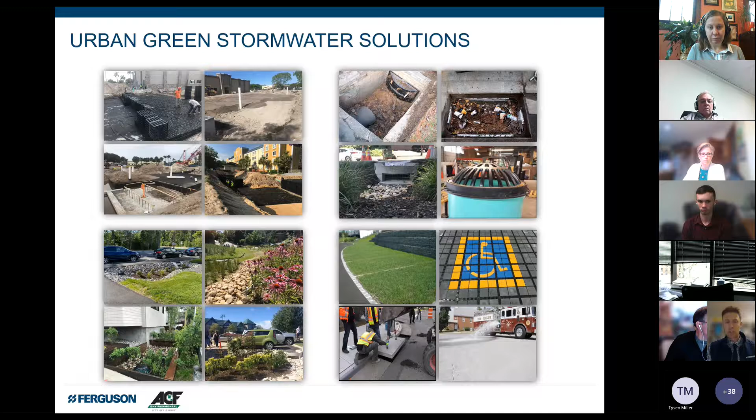So I work with a lot of different solutions in this space. The good thing is today we're not talking about products or solutions, we're talking about impact and natural resources. No matter where you go, every city, every town is dipping their toes in this green infrastructure space. Some have been doing it for many, many years, like New York City and Philadelphia. Others have been slow and steady to adopt, like in the Pittsburgh area, great set of demonstration projects.

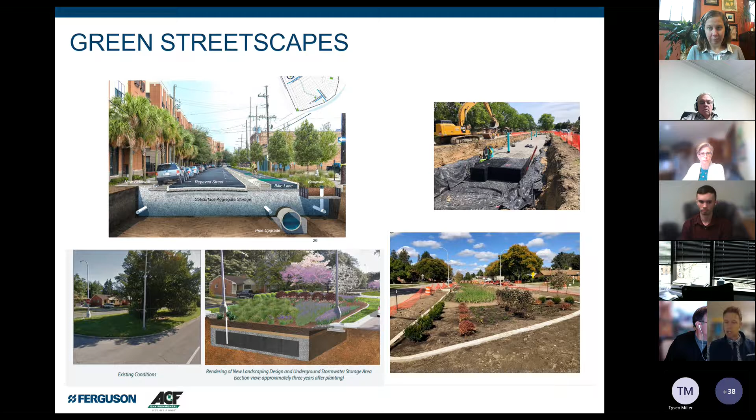And like Annie said, now it's kind of beyond that point. It's time to really push this stuff forward. But no matter where you go, everyone's got their different take on it. Some are more focused on water quality, some are more focused on water quantity, probably water quantity being the more popular option. And everyone has different expressions of what that is going to look like. The early adopters have learned a lot.

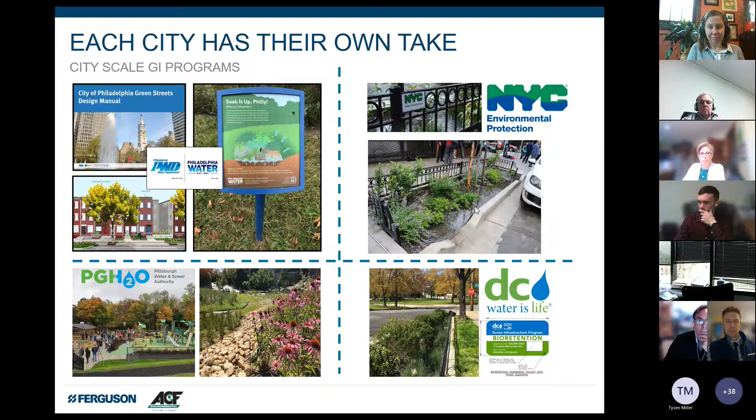But when you get into these urban settings, there are different complexities. We're dealing with tighter spaces, we're working around existing infrastructure, and construction may be affecting local businesses if we're in a streetscape application.

There's the need not to just throw it in the ground and say our work is done, let's move on, but actually monitor it, maintain it, see how it's performing over time to make sure we're not just spending a ton of money putting stuff in the ground to check a box, but it's actually having a positive impact on the natural resources downstream.

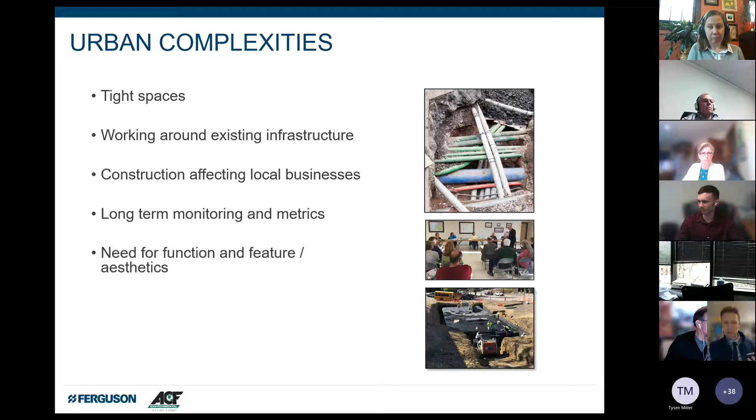The challenge of green infrastructure specifically is we're trying to get functional stormwater systems, but then there's a high expectation for them to look good as well. So planted systems, pavers, and all these different things - this is a tough balance to get right. This is where we need a civil engineer and a landscape architect to be linked and working together.

What I've also noticed is there's the research bucket, the design bucket, and the maintenance bucket. It seems like in general those are working somewhat mutually exclusively from each other. If that's the case, we're not taking what we learn in maintenance and bringing it back to what we need to research next, or how we're impacting our designs as we move forward. We'll touch on some of that today.

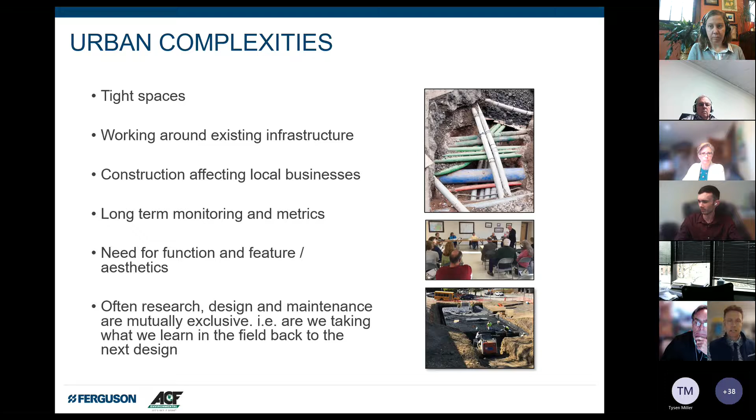So I work with a suite of solutions to overcome a lot of those challenges. Recently I added the word resiliency and climate change to this list. This is becoming a bigger issue, specifically on the municipal side - looking at a lot of undersized municipal stormwater BMPs that can't handle the kind of rainfall events and intensities we get today, and we're having to make adjustments to those.

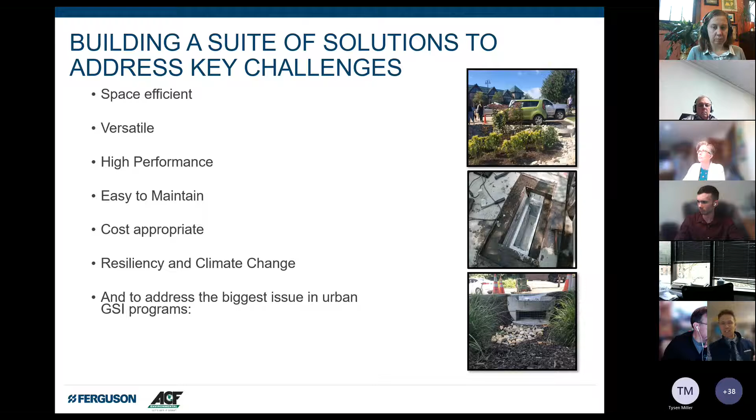One of the biggest challenges we've had to dive into is the need for better pre-treatment. We can put in the most amazing bioretention, the most amazing ponds in the world, but if there's nothing there to protect that system, not only do they end up not looking great, but maintenance becomes very expensive and time consuming.

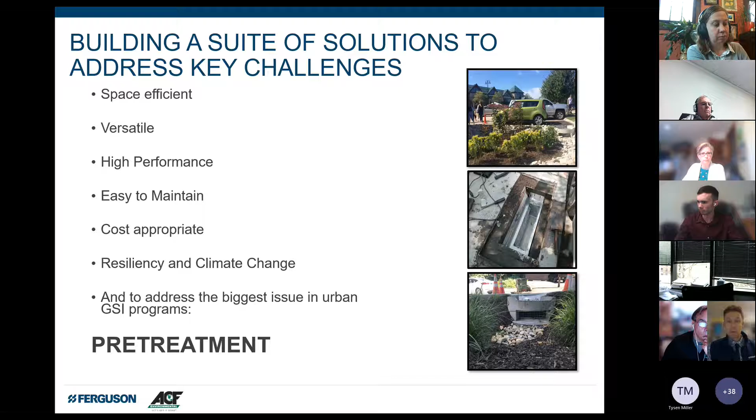We're seeing a lot of cities shift to this, including Pittsburgh, and I really enjoyed the presentation from Ryan Quinn and Anna Flores at Three Rivers, where they talked about stepping back and doing a better job protecting these things - whether it's curb line filters and screens and things like that - so we can have better outcomes and make our maintenance budgets a little more palatable.

Out of all these different things I've seen, people I've visited, engineers I've worked with, plans I've worked on myself, cities I've engaged with, I've kind of identified some shortcomings. They're not very amazing shortcomings, but a couple of things I started to see trends with.

A lack of interaction between owner and designer, specifically when it comes to maintenance and long-term needs. Interactions between design teams - civil engineers working mutually exclusively from landscape architects or the urban planning side, or not folding in some of the social or community pieces that need to be part of that process.

Quality bid documents - we're seeing across the country a lot of 30 to 50% drawings hitting the street for bidding. Well, those plans don't have the detail needed for successful projects, and when they don't have the detail needed, the quotes come in at a lower price than what's actually needed to fund the job. Then the job gets funded and there's not enough money to actually get what you want, and it starts to unravel fairly quickly.

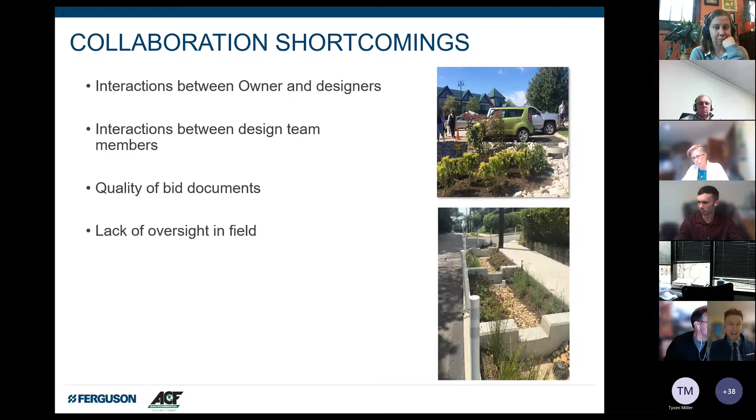Lack of oversight - no one's out in the field, and then we come out at the end of the job, point the finger and say you didn't get this right, you need to dig that up and do that again. The contractor's like, where were you? I was here for two months, where were you? We could have worked on this together. So we miss out on some of that collaboration.

And then, of course, one of the biggest challenges is identifying and following through on post-construction maintenance protocols, which we'll talk about a bunch today. I think historically, in the design community - and I know a lot of folks on the call today are from that group, so that's where I'm going to target my conversation - we've looked at this process as a one-way street.

We have design, we go into permitting, bidding, installation, and then maintenance, and then it's kind of like the end, right? But if that's the end, how are we learning from what we see in the field? I think there needs to be this reconfiguration of things where we get into more of a loop, and we have that maintenance, that voice of maintenance, impacting design.

I've seen that work really well in areas like Philadelphia, very strong focus on maintenance and learnings from that coming back to the front end. I had a great conversation with some folks from PWSA earlier in the week who were talking about this idea of maintenance being part of the planning process. Such a cool concept, such an important process for us to make sure that what we're putting on plans and what we're designing is being done with maintenance in mind.

So all of that said, I kind of kept seeing these things and I'm like, are these really shortcomings? Am I misreading the audience? What are we doing? What do I want to do? I want to survey folks.

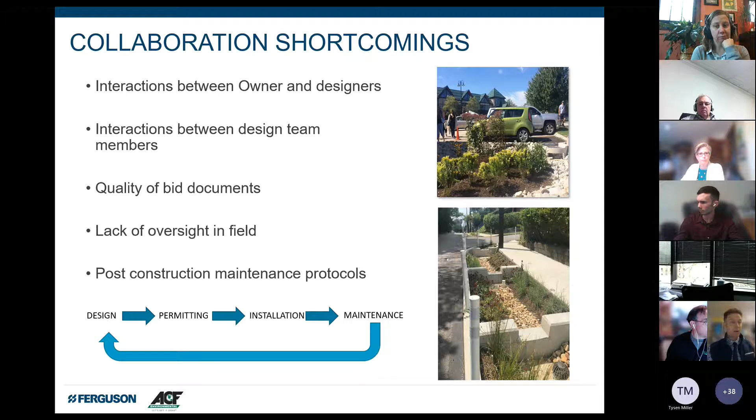So I said, I'm sick of going out and seeing these green infrastructure systems that probably don't look particularly great to the general public. Obviously, this one, not the greatest looking rain garden. This one was a civil engineering masterpiece where we had a perfectly rectangular rain garden with one plant species in perfect rows and lines. Boom, civil engineering masterpiece.

I get it, I see the beauty there. Trust me, a 90-degree corner is far better than some kind of curve. Or this one where plants were excluded and we just bulked up the riprap a little bit, right?

These are challenges. Or trash, debris. Are we planting trees just in holes? Are we providing environments for them to thrive? All these shortcomings all come back to, I think, some pitfalls in the whole collaboration process on the front end. So that's not me, but could be me as a response to some of these things.

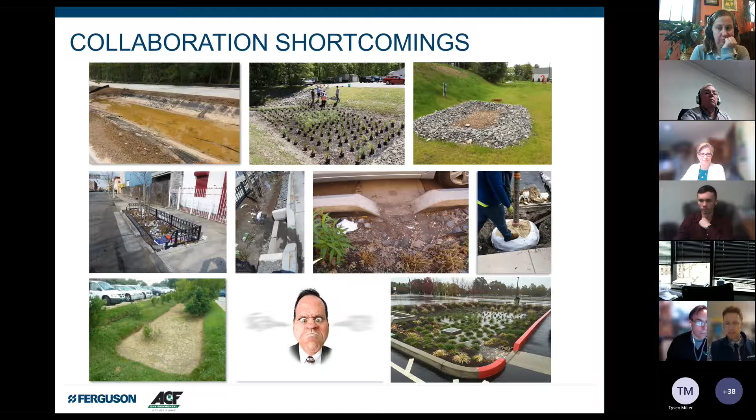So the survey was really created late one night, as many crazy surveys begin. The goal was really to try to get some useful feedback from the design community to confirm or maybe deny some of the thoughts I was starting to see, or patterns I was starting to see out there. I got a great response from designers.

Representing people from all over the country, predominantly on the East Coast. I thank you for those on this call who participated in the survey. I'll be honest, as we go through one by one today, the questions aren't perfect, and the answer options I provided were fairly simple. If I was to go back in time, I'd probably refine some bits and pieces.

But the goal was basically to address some questions about the design process, construction, maintenance, and then the overall connectivity between those pieces, and hopefully have the results shed some light on some things that we as designers need to think a little bit more about when we're engaging in these types of projects.

Now, not to share the conclusions before we get started, but it confirmed a lot of things that I was expecting, but I was hoping weren't true, if that makes sense. I was kind of hoping the data would restore some faith in the process, and unfortunately it confirmed a few things. But regardless, I think as we go through this survey today, question and answer one by one, I'm going to work through it all with you guys.

You'll start to see where there's parts, in your area of influence or your specific function at your company or your municipality, wherever you may be, where you can kind of step forward and say, hey, you know what? Maybe we need to step back a little bit and think a little bit more about this process before we dive into the next one.

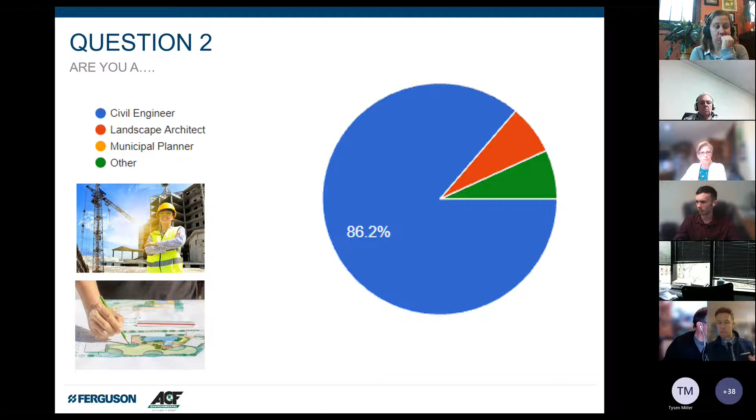Pretty big turnout from the civil engineering population, which I was a little bummed about. I was hoping to get a little bit more landscape architect wedge in there. But regardless, what I'm starting to see is landscape architects driving more of the planning process for a lot of these green infrastructure projects, which is great. So there needs to be that. Hopefully, if I was to do this again next year, we'd start to see that pie chart open up a little bit. But regardless, that's kind of the mix of people, just so you know who we have on this in terms of their professional duties.

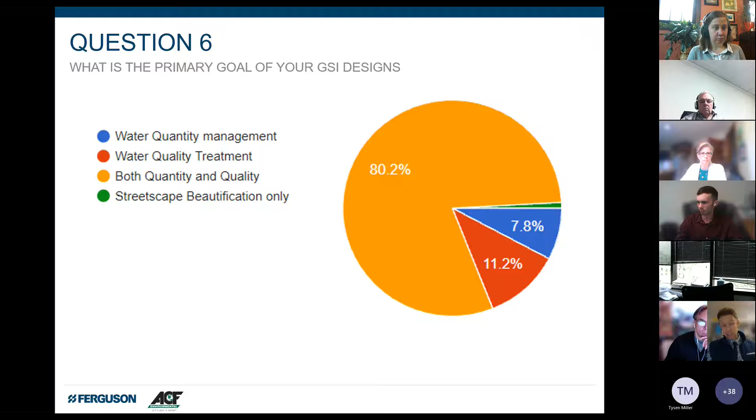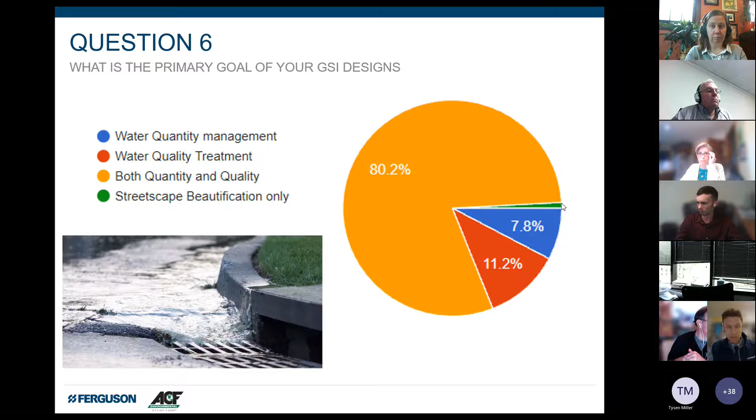What's the goal of your GSI design? Is it water quantity? Is it water quality? Is it both? Or is that not really your focus? Is it just about streetscape beautification? Here we have actually something that I expected, and something that was a little unexpected, I would say. Based on a lot of the programs being primarily volume focused, I thought there would have been a bigger wedge here in the blue. But it's interesting to see that well over 3/4 of the goals of these projects include both treating or filtering water as well as managing the volume piece. So that I found actually kind of interesting. And I think one person here pulled out street beautification, representing in the green corner.

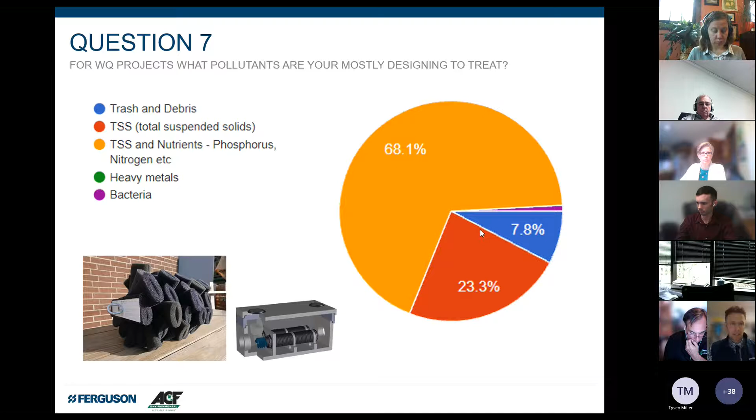I would expect that in a year or two, if we were to redo this survey, that purple wedge would start to open up a fair bit, because bacteria—a lot of the plans or environmental studies I see out there will talk about two issues: impervious area, and now quite a few on the coastal sides are bacteria.

I don't think a lot of people know how to manage the bacteria part of that. I know there's a few folks on the call from Fabco today who make a couple of products in that space. Question 8, this is one I was really nervous about: are you passionate about the connection between your design work and defending downstream natural resources? Yes I am, kinda, or nah, it's just what I do for a job. A little bit of honesty here in the yellow segment, right? But this is actually pretty cool.

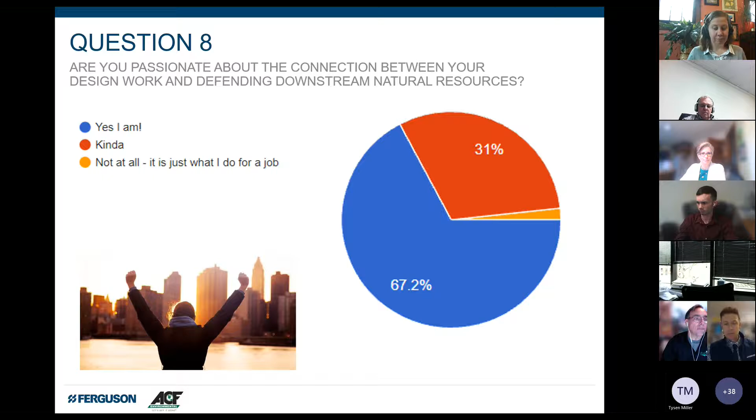Two-thirds of people, almost on the dot, are passionate about that. I don't know what that looks like—would they go home like, 'honey, I can't tell you what I did today, I designed a rain garden'? I don't know where the passion goes. But the good thing is that there's a connection there, because if there is no connection, we're never going to fully uncover the triple bottom line co-benefits of green infrastructure, because we miss out on a lot of those social and community impacts, since it's not even affecting us as humans. So there's our hero right beside the lake, excited about what just happened and the nearest upstream green infrastructure project.

Question 9, going into those triple bottom line co-benefits: do you believe that your designs connect with the triple bottom line co-benefits of GSI? These are described in many different ways from one place to the next, but usually in the environmental category that's an easy one to do—you're like, yeah, we're filtering water, boom. But then the social and financial benefits, how are those pieces being communicated?

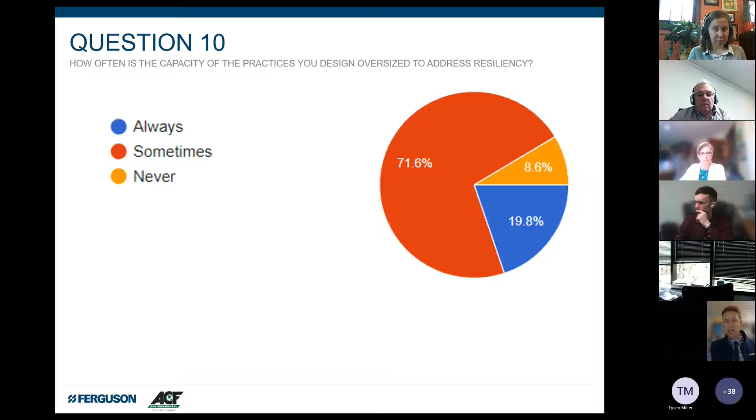Question 10: how often is the capacity of the practices you design oversized to address resiliency? Always, sometimes, never. This one was kind of interesting—sometimes was actually bigger than I thought. I had a feeling it was going to be more in the never category. But regardless, if we add half of the sometimes—say we take 35% there—and add that to the never, close to half of the respondents aren't thinking about the need to take maximum advantage of the space we have for storage for future issues.

So trying to work out ways to maximize storage so we don't have these issues with these types of rainfall events, the frequency and intensity we have. Resiliency seems to be a big buzzword at a lot of conferences and seminars these days, and we're seeing a push on the funding side as well as implementation to say, okay, we could fit 100 cubic feet of water in the ground here, but for a small incremental increase in money, we could maybe store twice that amount. AKRF did a really interesting study that Tom Bertroni presented early in the year for PWSA, specifically about how if you double the size of a system, it doesn't necessarily double the cost. That's something we have to keep thinking about—if we're going to dig a hole, that's the best time to do the most we can possibly do with that hole before we move on.

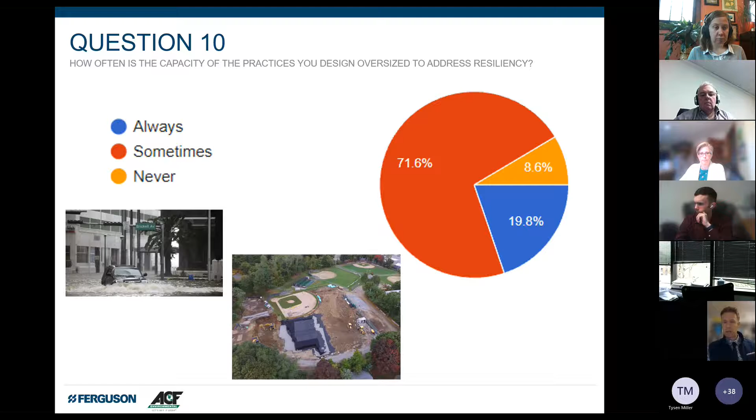Question 11: do you include innovative and proprietary practices in your design? This was kind of a curious one for me—I'm in that innovative proprietary practice space. So is it always? Is it sometimes, when traditional practices aren't feasible? Or is it never?

Great answer here. Obviously we've got a few folks who use them all the time, 85%. I think this is a perfect space to be—folks saying, okay, I'm going to evaluate the traditional practices, I'm going to see what I can do, but I know that if I can't get those to work, I have other alternatives I can go to. I was encouraged to see only a very small portion say never. That was a good one.

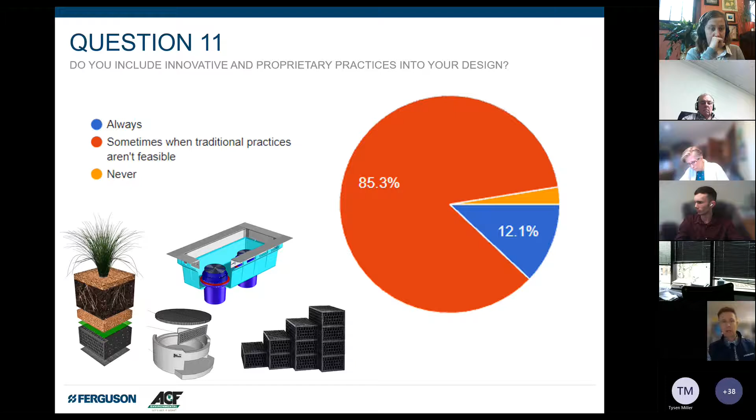There are many things out there for all kinds of different needs: space efficient rain gardens, filters, cartridges, screening devices, different storage devices, chambers, tanks—all kinds of things that can be used to try to optimize design, especially when space is tight.

Question 12: do you research new design approaches in GSI, or stick to what you have used in the past? Options were: always look for new approaches, sometimes look for new options, but generally stick to what I've used, or never use new approaches, never.

I think, honestly, we really want to see that be 100% looking for new approaches, because we have to look at what's out there, study the projects around us, different cities, what they're doing, learn from those, and fold them in so we don't get stuck with the same design manual 10 years later and wonder why we aren't improving our outcomes. So think about trying something new.

Question 13: do the civil engineer and landscape architect collaborate and work together in your designs? This is one I was really curious about as well. Do they always work together well or collaborate, sometimes, or never?

Some truth here, we got 8% in the never—that's not a good place to be. This is a little unsettling for me. Again, if we look at the sometimes, we split that in half, so it's about 30%, add that to the never. We're saying that around 40% of the time, we're not collaborating well between the civil and the landscape architect.

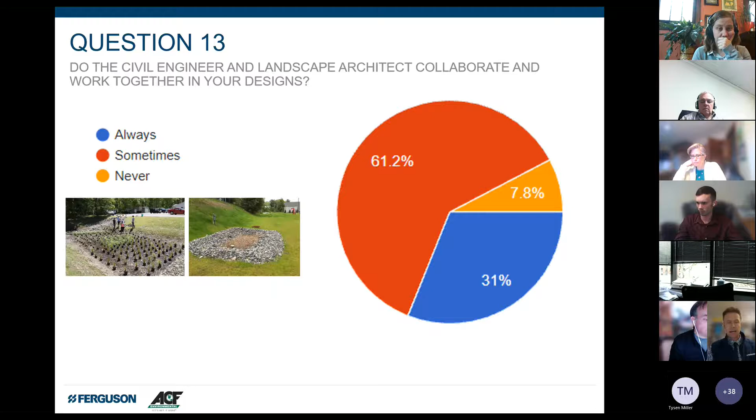To me, that's a major flaw in the process, because especially when we get to surface green infrastructure, we're thinking of plantings and things like that. We don't want the civil engineering masterpieces I was talking about earlier. We need to make sure these systems, whether it's plant selection, plant location, shape, size, dynamics of the system, whatever it may be, both parties need to be involved. So we've got the functional part and the aesthetic part, or the feature part.

And I criticized these publicly earlier—I'm sure I've designed things that look exactly like this in my design past. But then on the other side, landscape architects maybe have too many plant species, or they're too close together. There's kind of a happy medium between these two approaches, where maybe you have 3 or 4 plant species with a certain amount of spacing between them.

Because the key thought is, when maintenance crews come out to look at these things, they need to be able to determine what's a weed and what's a plant, what's an invasive and what's not, and call things out accordingly. If there's confusion, they'll either leave it to overgrow or deadhead the entire thing, and that's not really what we want to see.

So it's really important that these groups are working together. I know a lot of firms now are starting to fold both groups into one firm, so you can work collaboratively in that same office. I think it's fantastic. A lot of firms still sub one part out to the other. This is something we have to really get resolved, because the aesthetics, the public opinion, is often heavily tied to the way these things look.

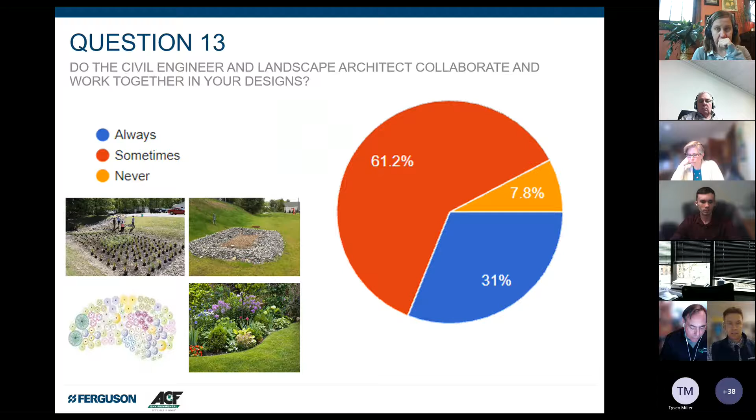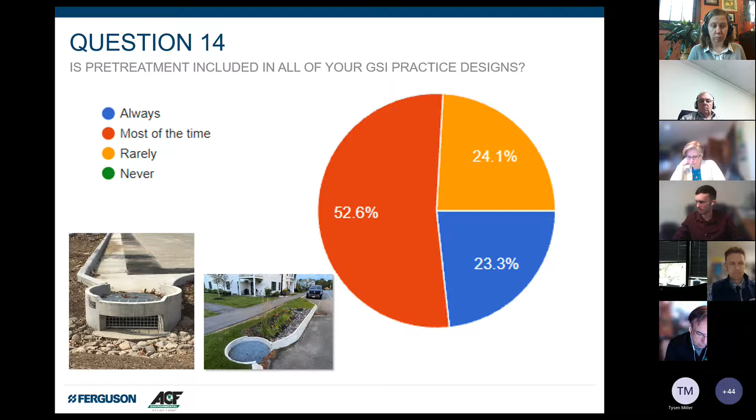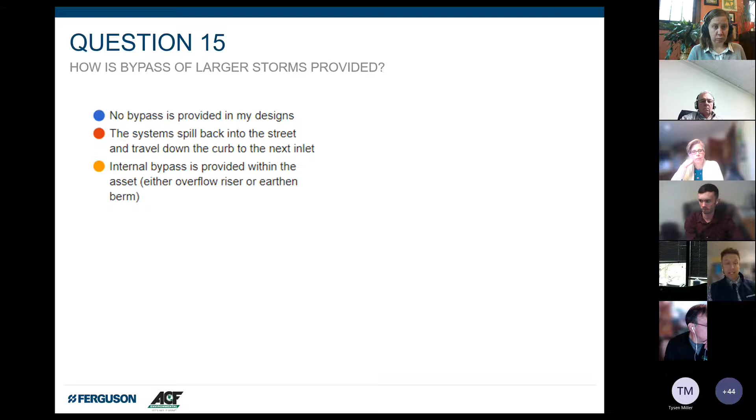This is a big one. Question 15: how is bypass of larger storms provided? No bypass is provided—the systems spill back into the street and travel down to the next inlet—or internal bypass is provided. This one was pretty encouraging. Most folks are realizing now that having some kind of internal bypass makes a lot of sense. Usually that's some kind of domed overflow, which helps rather than just spilling out wherever it wants to go, or when it spills back onto the street, functionally that can make sense to go into a downstream inlet.

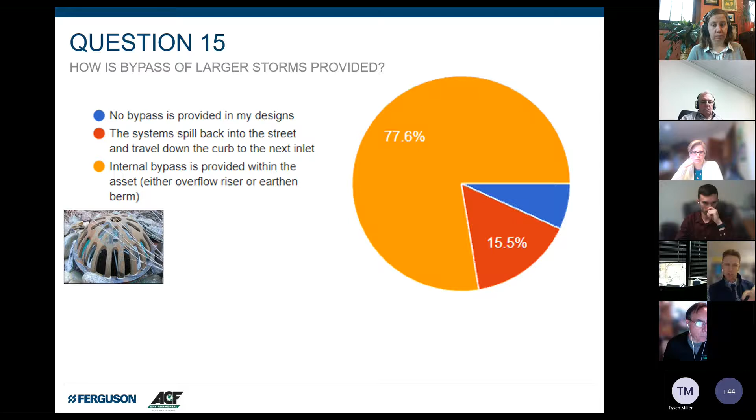But public perception can be confusing there, where they think, oh, this rain garden's failed. Well, no, it's actually at its maximum capacity, and now it's heading down the curb. That can look a little odd. Especially where we have winter climates, icing along curb lines, we want to try to keep things internal to the system. But when we put in these domed overflows, they can also turn into mulch cocoons, or whatever we want to call them, where floatables and things like that gather at this kind of overflow.

This is a challenge because a lot of states and cities design with very small diameter pipes downstream of these systems, so there's some great options out there. We actually can deploy a filter bag in these. This is something PWSA does routinely, and Philly does the same thing with Philadelphia Water Department.

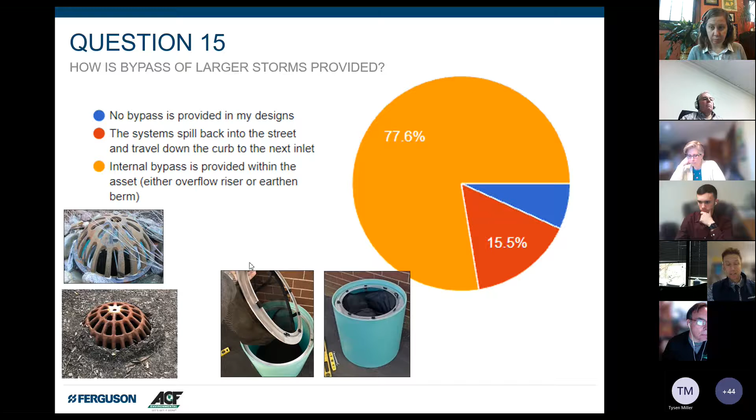This is actually a really nice retrofittable device that my friends from Fabco on the line make. What's nice here is it's an expanding ring, so it goes into the structure and you can expand it out so it presses against the wall. That becomes the mounting ring for the bag, versus hardware going through that. But despite that, this allows you a place to collect that mulch and trash, which again makes maintenance easier—good for that kind of bypass protection.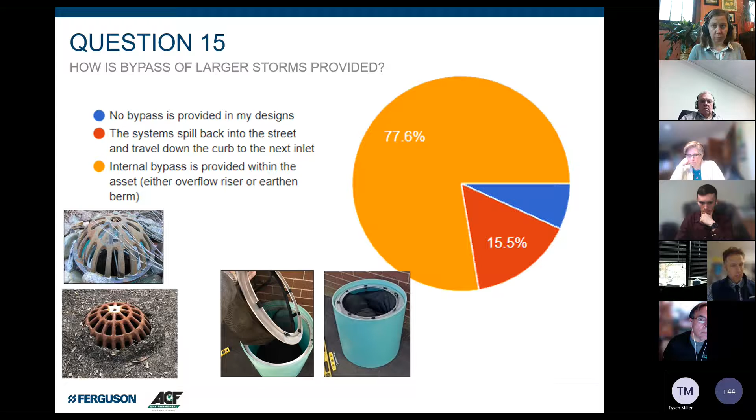We're seeing a lot of cities line up to say, hey, that's not a bad idea to add. Question 16—we're past the halfway mark now. Do you design with permeable surfaces? Often, sometimes, or never.

This was kind of an interesting one. 70% said sometimes, so if we split that in half, we call that 35% and add that to the nevers. About half folks don't entertain permeable surfaces in their designs, which is interesting because it's a pretty popular way to get water into the ground, especially with shallow groundwater and not a lot of vertical room to work with. I think the challenge is a lot of the early types of systems with permeable surfaces don't hold up well in winter type areas, whether it's snow, sand, or salt. Those early products like straight up porous asphalt have maybe jaded our interest in doing this over large areas.

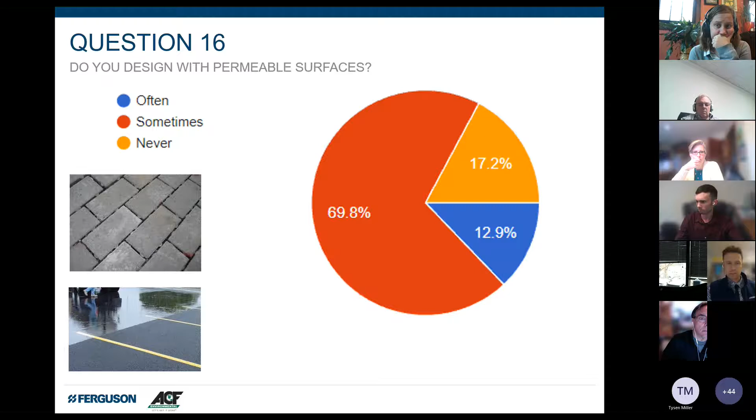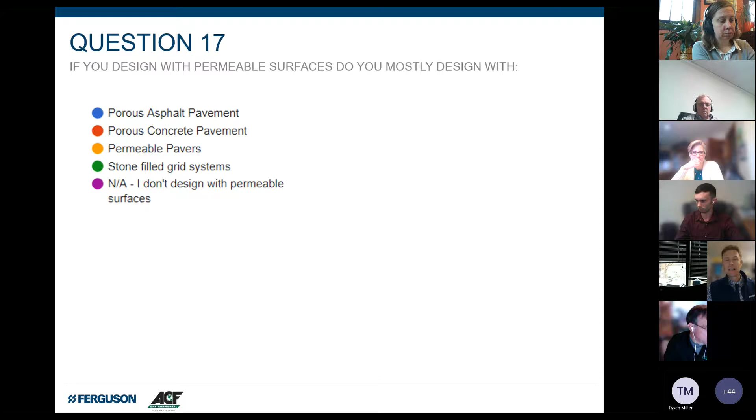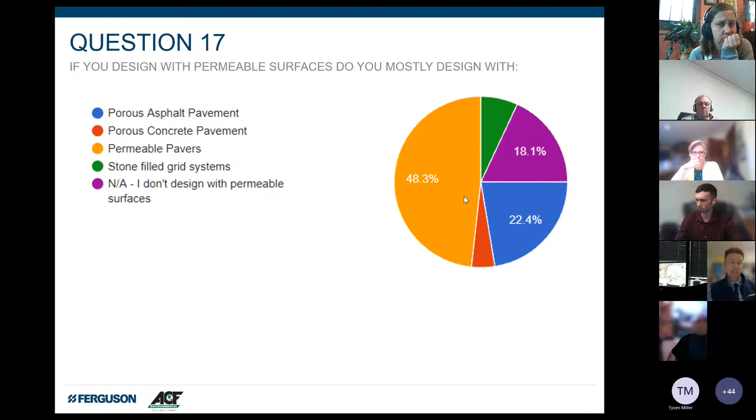So let's dive a little deeper. If you do design with permeable surfaces, what do you mostly design with? Porous asphalt, porous concrete, permeable pavers, stone-filled grid systems, or I don't design with permeable surfaces. So there's our 18% holding true on the 'I don't use them.' But interestingly, about half the folks are looking at permeable pavers, which I think is pretty typical. You get some aesthetics out of it, and generally you can do them in small areas versus porous asphalt that you need to do over larger areas.

I co-presented in New England a few weeks ago where UNH was sharing some of their research on porous asphalt, and there was also a consultant who does a lot of work with porous asphalt talking about their experience. The consultant said that porous asphalt mostly, depending on where you're located regionally, generally only makes sense if you're doing even as little as an acre. An acre or more is where you hit the threshold where it makes sense for the plant to make it, where the QA/QC is in place to get a good mix, good placement, and oversight. I would say maybe half an acre or more, but this particular consultant said an acre or more.

So for smaller sites, these small retrofits or on-street parking or whatever it may be, I think that's why pavers make sense, because you can do one paver or however many you want. The other interesting thing from UNH's study on porous asphalt was they found that even with routine maintenance, by the 10-year mark all of their permeable asphalt had become impermeable. It was no longer taking water through. They also found when they did test pits that the only thing clogged was the porous asphalt itself - the stone beneath was clean, the underdrain was clean. It was purely a clogging of the surface and an inability to rejuvenate it without digging it up. I thought that was kind of interesting.

A lot of the work I do is with permeable pavers, but even beyond general permeable pavers, there are open joint permeable paver systems out there that don't even put aggregate infill, so you get really rapid transfer through and really low maintenance. So if you're kind of a skeptic on permeable surfaces, keep an eye out and take a look at some of the newer innovations.

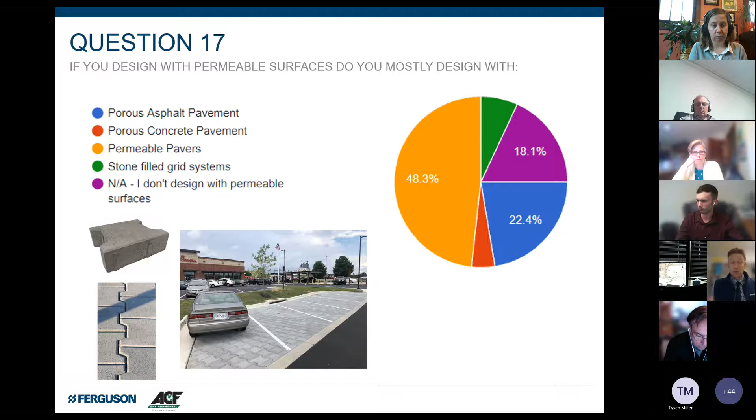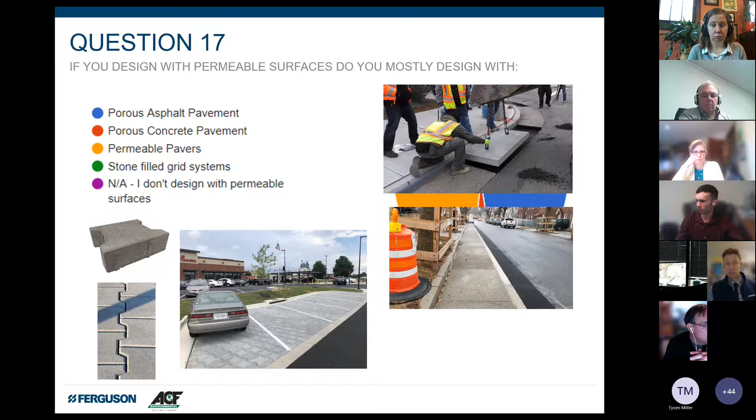There's also precast porous panels out there, and I think some folks have seen this product called Stormcrete that Porous Technologies make. It kind of overcomes the cast-in-place issues, again with a quantity piece, but also provides a product that can be picked up after the fact, cleaned, replaced if needed, and put back, versus that porous asphalt surface that once it's clogged up, you can't really do much with it. So there are different things coming out that solve a lot of the challenges there.

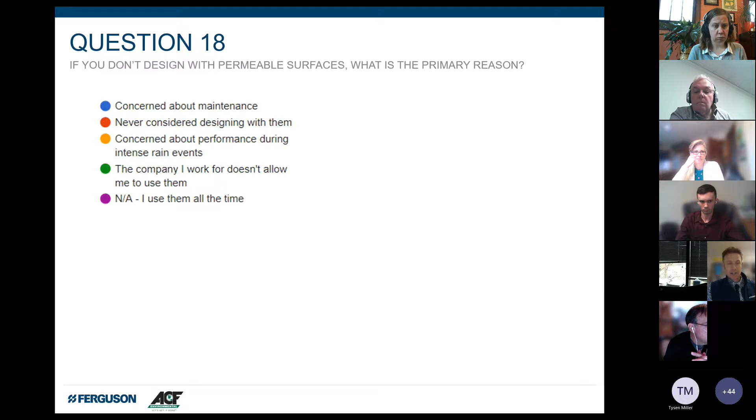Question 18: if you don't design with permeable surfaces, let's get over to the nevers. What's the primary reason? Concern about maintenance, never considered designing with them, concern about performance during intense rain events, the company I work for doesn't allow me to use them - I heard that once, so I added it - and not applicable, I use them all the time.

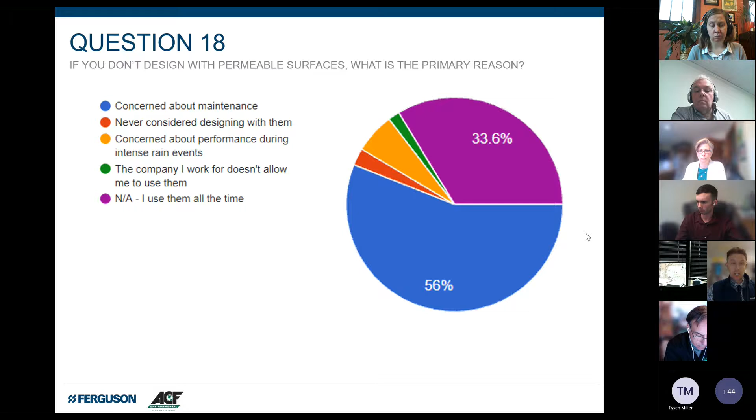So as probably can be expected, that maintenance concern - maybe that's budget, maybe that's equipment, maybe that's frequency, cost, who knows - but that's generally where we see the primary concern. And then again, these folks saying, no, I'm good, I use them all the time. So maintenance is that big question around permeable surfaces.

I think when it comes to these surfaces, you've just got to come up with a plan where you've got routine maintenance happening, vacuuming them out from time to time, not waiting till it gets to that point of failure, because that's where it becomes much harder and more expensive to rejuvenate them. There's a number of companies that have a whole bunch of different vac heads out there to help with this process.

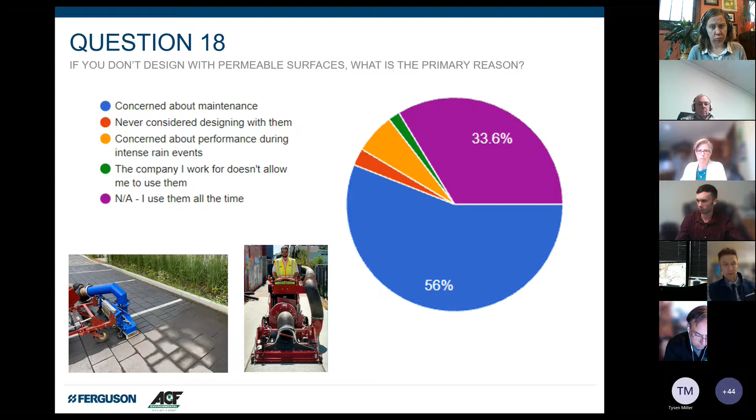Question 19, getting into some plants piece now - is plant selection a priority in your design? Always? Sometimes? Never. Brace yourself.

Okay, so we're doing green infrastructure, and if we split the 58.6 in half, that gives us about 29%, we add that to the nevers, we're about 40% of people who aren't prioritizing plant selection in a green infrastructure system. I think that's something we have to address, right? That gets back to the whole collaboration between civil and landscape architect. This needs to become a priority because we need the plants to be sustainable. We need the right selection, the right spacing, all these things. And if we're not doing the right plant selection, that's going to impact the way these systems need to be maintained as well. So that's something we have to be talking about and making sure it's a priority.

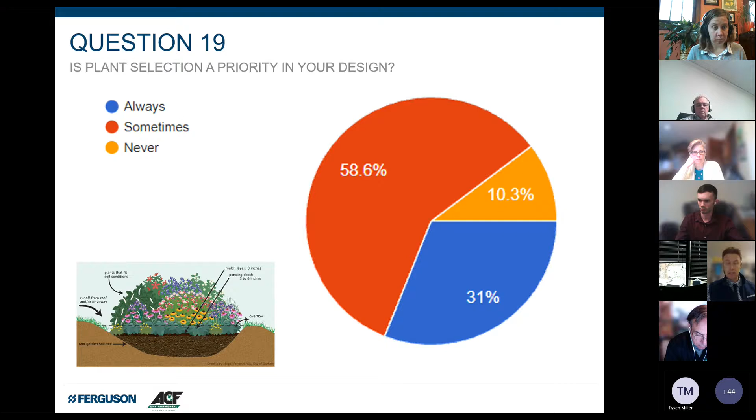And I know there's certain cities out there that have a specific planting guide - this is how you do it. I know PG County in Maryland, when they were doing their P3, they had a very specific guide, so this is how every single one of their standard BMPs are going to be planted. So they had simplicity, consistency, and they knew the obligations for each of their sites.

So sometimes I think this is one of the biggest gray areas. Once the plants are in, who's responsible for establishing them? Is the contractor on the hook for a year to come out and water and get them going, or replace plants that die off? Is that not spoken of? Is that something that, in the case of Pittsburgh, PWSA takes on, or in a private site development, the owner takes on, or the landscape contractor? This is a bit of a gray area.

I know in New York City for many years, contractors who did right-of-way bioswales were on the hook for plants for 2 years, which I don't know is very fair in a big city like that when you can't really control what comes in and who walks through and deposits what they deposit in these rain gardens. So this is something we have to continue to build out in our specifications and planning.

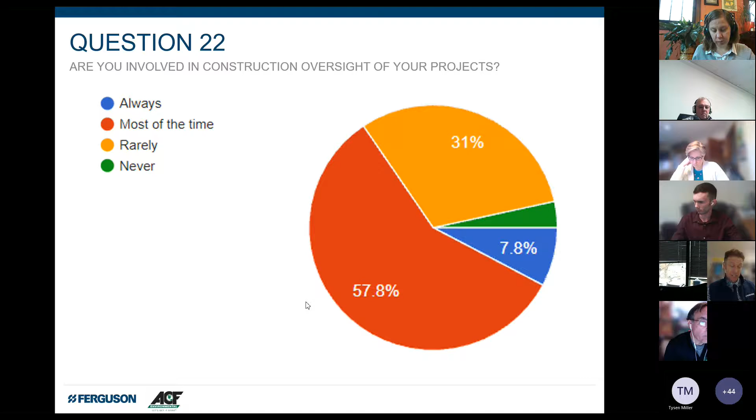I know it's not budgeted for, and it's not like if you were paid to go out as an engineer or landscape architect to inspect sites, you would. But I think this is a really important part. I think it also helps establish good rapport with the contractors, because you're linking arms and partnering with them as opposed to being back at your desk designing the next project and then coming out after the fact being like, no, that's not what I intended to happen here.

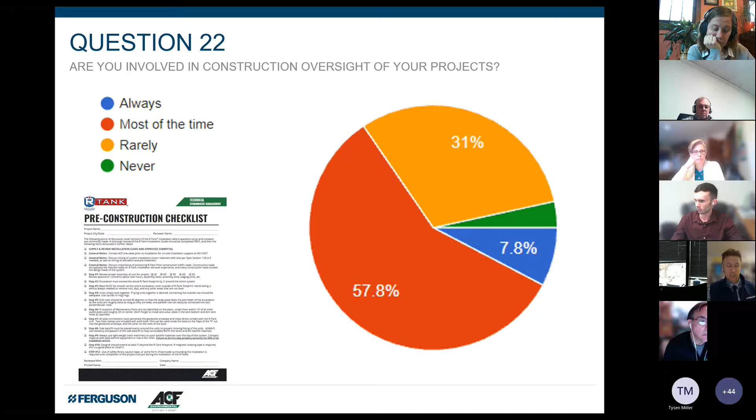So it doesn't have to be the engineer of record. It could be the engineer of record, it could be the landscape architect of record, it could be the client's rep, an owner's rep. For some of our innovative systems, it's often good to have the innovative company out there because they know their systems better than others. But you want to make sure that oversight is provided. It's not to babysit the contractor, it's really to make sure we get good outcomes.

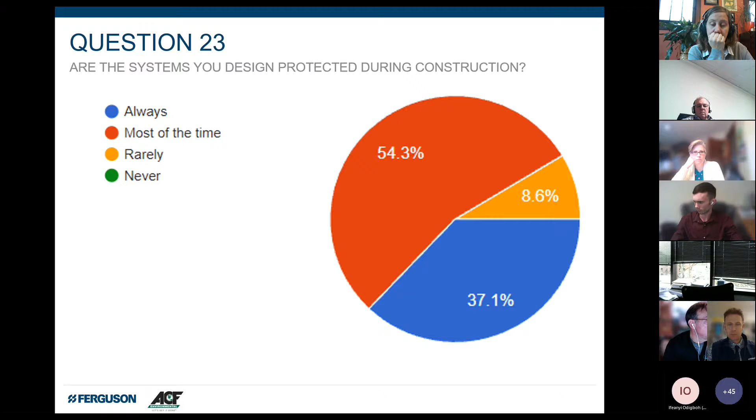This is something that I see missed a lot. We see really elaborate erosion control plans, erosion control mats on 3-to-1 slopes, TRMs on 2-to-1 slopes, and riprap on 1-to-1 slopes, whatever it may be, and a lot of folks put silt sacks in the inlets, awesome. But what about the surface of the media itself? What's preventing those unvegetated slopes from sloughing down and impacting, say, the surface of a rain garden or a specific kind of media?

Smaller footprint systems, you can put blankets over them just temporarily to cover that system and protect it while everything else becomes vegetated. I've also seen folks run silt fence around that, which works well, but silt fence can be difficult to remove sometimes, so you want to be careful at the end of the job. Now you've got everything established, and you get in there and start ripping up the edge of the system, so you've got to think smart about those.

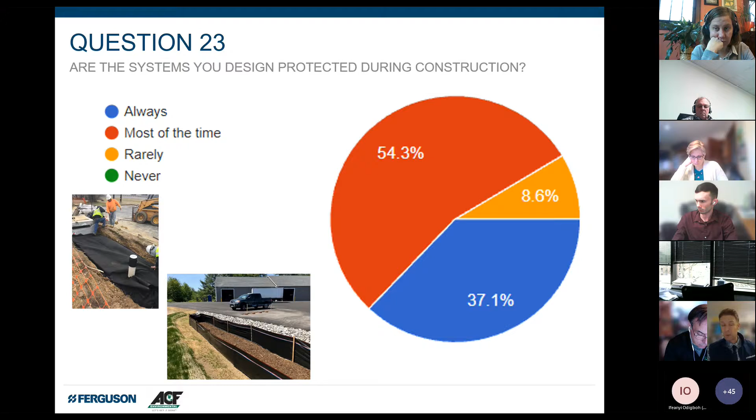But I think having provisions for the phasing and protection of these systems, or saying, hey, this rain garden mix can't go in until certain other things are stabilized around the site, is important. Again, I see these beautiful E&S plans, but they seem to not include specific notes about the green infrastructure systems themselves, even protecting permeable pavement so that sediment doesn't run on and clog the gaps during construction. That's not cool.

We had a project way back with an 8-story parking garage being built with a surface parking lot. The designer had originally designed it with a 5-foot diameter pipe subsurface storage system that went from this edge of the site all the way over to the train tracks. It got bid that way, and then the GC said, 'Hold on, we've got to set up a crane, we've got to bring in heavier vehicles that exceed HS25 load rating, we're going to crush that pipe system.' So we worked with them to do a smaller footprint modular box system, the high void space system, only because of the construction phase piece.

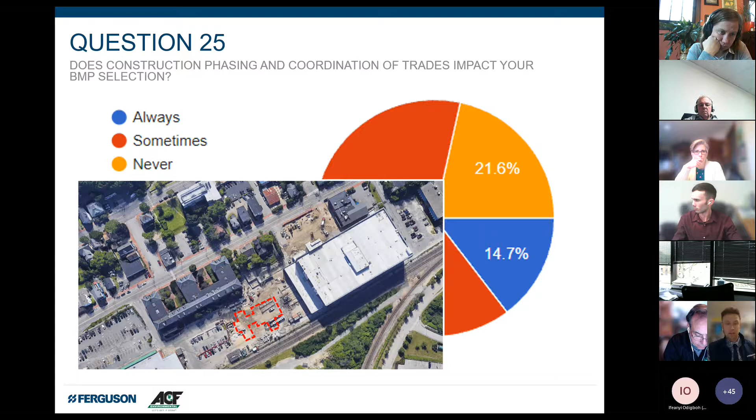After the project was done and the surface of the parking lot was completed, that 5-foot diameter pipe system would have been perfectly fine, but having a smaller footprint allowed that coordination to happen. These are things we have to think about: how to protect those systems during construction and how to make it easy to assemble buildings when they're bringing in cranes and other things. We don't want to destroy the stormwater assets.

Sometimes or never, and I gave everyone a little grace here. You know, I need to move on to the next project, no time to pause, I get that. I wanted people to feel free to just acknowledge that they can't stop, they've got to keep going.

The design community, which I'm part of, civils, landscape architects, planners, even on the municipal side with internal staff. There's such a need to keep cranking out these projects that I'm not sure we pause to learn from what we've seen on past projects. And I get it, when I was working as a consulting engineer I had no time to go out and look at these systems when it was raining, in my quote spare time. Nowadays I find myself on sites more so I can see some of that and hopefully share that information. But this is a big deal.

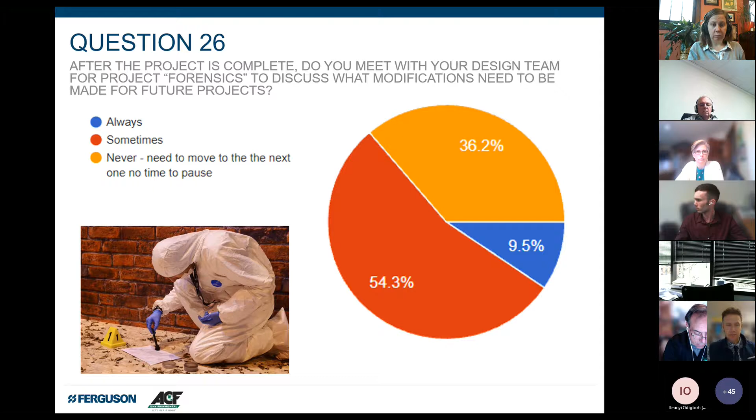We've got to go out and look at them and say, you know, I think I need to tweak that detail a little bit. I think we need to change the way we're doing that. I think we need to leave a little more space between the inlet point where the plants are because they're getting blown out, or we need to change our soil mix because it drains really well for 6 months but then after that it doesn't. Whatever that may be, we've got to do that part. That is so important - get out there in our hazmat suits and start checking out what went wrong.

So we'll split the 'most of the time' in half and add that to the 'rarely'. That's 75% of people who feel like these systems aren't maintained as well as they should be. That's probably honest - the reality is there's a lot of systems out there.

When folks say, hey, I'd like to go out and see some of your biofilters or some of your paver systems, I'm like, oh well, we don't want to go to that one, we don't want to go to that one, we'll go to this one, right? Because these other ones I know haven't been touched since they were put in 5 years ago. And guess what - they're weedy messes. Who would have thunk it?

And I see two very distinct groups here. When it comes to groups who own maintenance and budget for it, where you have designated crews, these systems end up looking really good. Then you have the other side, where something goes in the ground day one and no one ever visits it again. I don't see a lot in the middle - there's the ones that do maintain and the ones that don't, very few in the middle. We need to get more of those don'ts into the do's, but that comes with a cost, so we have to be budgeting for that.

This was an interesting project I saw in southern Florida a couple weeks ago. An engineer mentioned the town had tried out some green infrastructure, but it hadn't really been received well. I went out to look at them, and they clearly haven't been maintained. It was probably also one of the scariest streets in the neighborhood. I'm sure someone said, hey, this would be a great way to enhance and bring up the community here by adding some green infrastructure. But I have a feeling the maintenance crews aren't too excited about hitting that street regularly because it's a little bit dicey driving there.

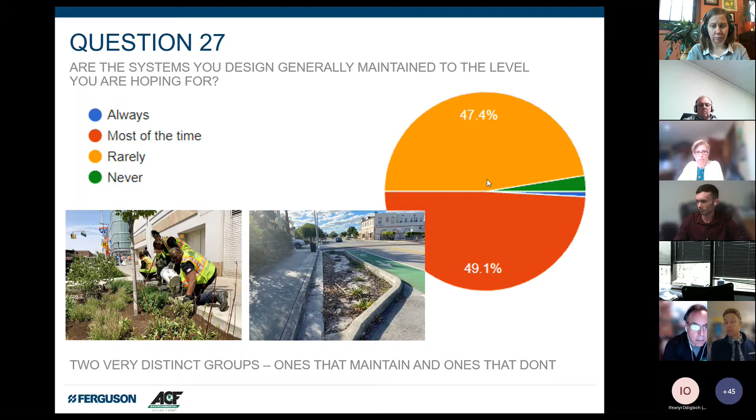We've got to be thinking about these things. If the designers are saying they're not maintained to the level you're hoping for, we as the design community have to step up and do a better job communicating this message, making sure this is accounted for before we start digging holes and putting things in the ground.

At least we've had that conversation. And then at least the listener has to react in some way, either to budget for it and get it done, or to say, let's just see how it goes.

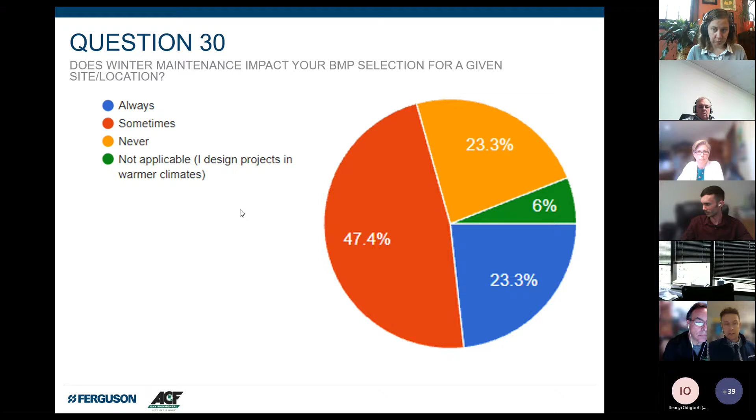So that's a conversation that needs to keep going on, because if you're in a winter climate, these BMPs are definitely dormant for a period of time or are working at a slower rate, and they also get hit a lot harder by some of the severity of the winter that we deal with.

If I was doing this in public in front of you, we'd have a little, you could raise your hands and say what you think the answers are going to be. So maybe just take like 10 seconds in your head and jot down on a piece of paper what you think the survey is going to say. I'm going to take it from lowest point value up to the most popular answer as we work through the board. So have a little thought. If you get the top two, give yourself a pat on the back. If you don't, you don't have to confess to anybody. It's okay. So here we go.